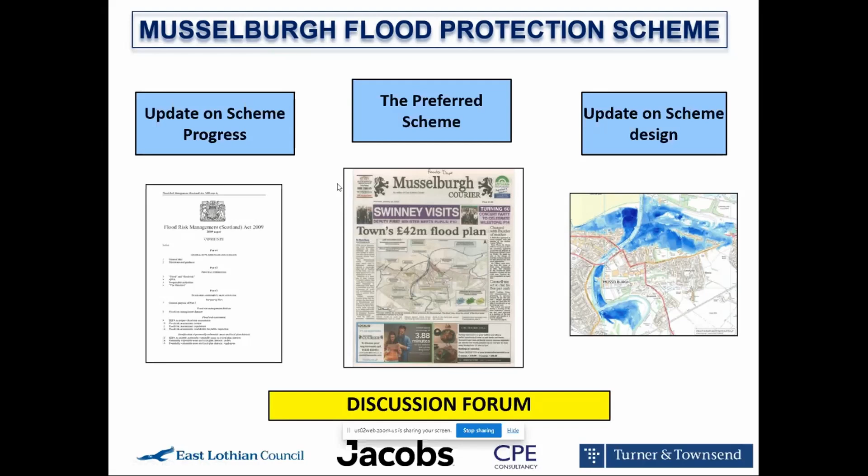So first of all, in relation to scheme progress, I wanted to begin the journey tonight by reflecting back to what I said to you in January 2019.

In relation to that evening, which you've already been reminded of, the presentation that night was broken into 2 parts. The first part was delivered by Gail Donald of SEPA, who turned up to provide you with an overview of flood risk management in Scotland and local flood risk management plans, flood mapping, and the Scottish Government's approach to taking forward flood protection schemes. Thereafter, I delivered the second part of that evening's event, providing you with an understanding of what a flood protection scheme is, how one was being set up for Musselburgh, and what the next steps would be in setting up such a flood protection scheme.

In relation to that event, I would just like to highlight that the slide deck from that event, as I recall, was made available to your organization back in 2019. If you don't have it, or if you have lost it, so to speak, we'd be delighted to provide it to you once more. And I would like to suggest that for all of you, it provides a very good snapshot into the early stages of a flood protection scheme.

Tonight, we're doing our best not to recover that ground, but back to back, they provide you with a really good journey on how we've traveled from the beginning through to today.

Just moving a little forward, I wanted to just again reflect back to that last event that we met. This is one of the slides from that presentation. Within it, towards the end of the presentation, I finished with what were the next steps.

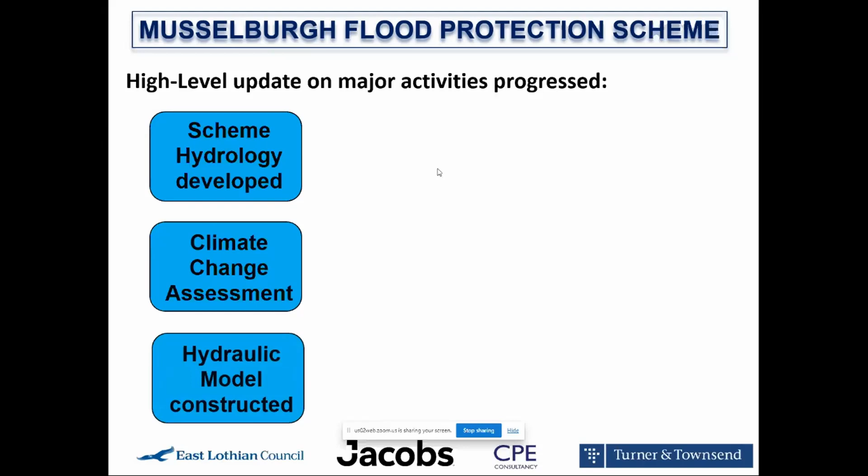The hydraulic model exists within our computer systems, and it is the tool through which we can map and model the flood water, and therefore produce flood maps of the extent of flooding within the town. The outputs from our early stage model were presented through the public exhibition to the town back in July of 2019.

We have been undertaking many surveys. I referenced quite a few of them earlier, and many of you should have seen the survey work undertaken across the town last year. In particular, you should have been aware of the ground investigation, the borehole rigs which were extracting ground samples from across the town.

We've been undertaking a significant piece of environmental work, and apologies for the acronyms. EIA stands for our Environmental Impact Assessment, and that has now formally commenced. Leading up to its formal commencement, we required to undertake a vast range of ecological surveys to capture baseline ecology data across the town.

We undertook a PEA, which stands for Preliminary Environmental Assessment, and we then undertook a formal environmental screening and environmental scoping exercise, the outcome of which is the structure through which we develop our environmental impact assessment to determine any potential environmental impact from our scheme, and then, if appropriate, to undertake appropriate measures to mitigate.

We set up and commenced our stakeholder working groups. These are with key stakeholders, statutory stakeholders, those with responsibilities under regulatory and legislative frameworks who work on your behalf as arms of the state.

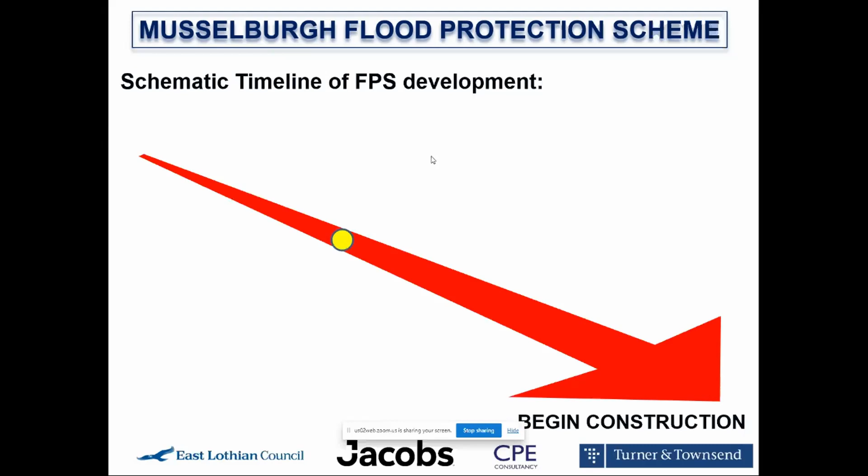Changing approach slightly for a minute, I wanted to walk you through the sort of pathway through the progression of a flood protection scheme as key points. Some of you will have seen this before, and indeed the only thing that has substantially changed on this timeline is where we are on it, so we have moved substantially down the timeline.

But to begin with, we need to define the problem. We need to gather huge amounts of information, work out all of the options, then determine the best approach, which is our option appraisal process, consult with many parties to determine what they think of our thoughts and approach to mitigating the risk, bring all of this together to determine the preferred scheme, which has concluded, and thereafter we need to undertake an outline design of that preferred scheme to confirm it's viable and technically feasible, and to allow it to evolve, because evolve it will through that design process.

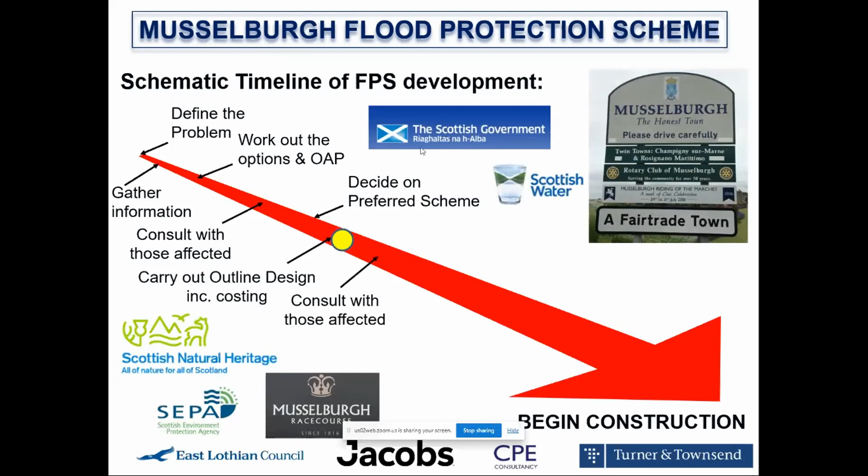And then at an appropriate point in time through the evolution of that outline design, we need to re-engage with all of our key stakeholders and the people of the town before once again making an engineering judgment to bring it together so that we can deem the best approach to flood protection for the town, which we then take forward to formal approval to get the scheme approved. And only once the scheme is approved do we cascade into the detailed design, preparing construction drawings, developing a tender, such that we can take forward the project to work and therefore begin construction.

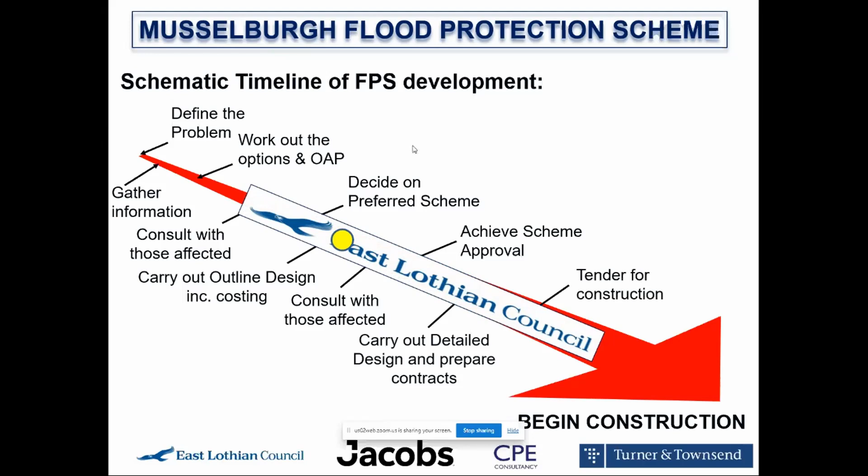So it's a long journey. There's a lot of steps on it. There's no point pretending it's easy nor quick, but at the same point, we're making continual systematic progress through that pathway and will continue so doing.

Which leads me on to the preferred scheme. So the preferred scheme is a key stage on our journey as we move forward. It's not the final product, it's simply a step on that journey. But it allows us at a moment in time to crystallize our thinking pertaining to where we're at, to put it down in words and form, and to take that forward for formal approval.

Now that formal approval was achieved through an East Lothian Council Cabinet meeting on the 21st of January 2020. And Cabinet approved the preferred scheme at that point in time. And within that report, we made key recommendations as to what they were approving and to clearly define what it was that we would then do to move this forward.

I think it's worth just highlighting a point that has been raised to me on a number of occasions by the town's councillors, and that is a feeling of disappointment by some within the town that that report was taken to Cabinet and not to Council, because not all councillors are in the Cabinet, and most of the town's councillors did not get an opportunity to participate in that decision making. The town's councillors were part of the public exhibition and the engagement, but it is clear that they were not part of that Cabinet meeting if they were not on the Cabinet.

So within that report, we changed the journey process, and we now have clear instruction that the next time that we need to get approval from within the council, we will be going to council itself and no longer to Cabinet. But for that meeting, I was bound by a previous requirement or obligation to go back to Cabinet, and I couldn't jump across parallel pathways to Council. It's slightly complex, but just to highlight that we have corrected that historic error, and that will not be happening again, further to clear request from the town's councillors.

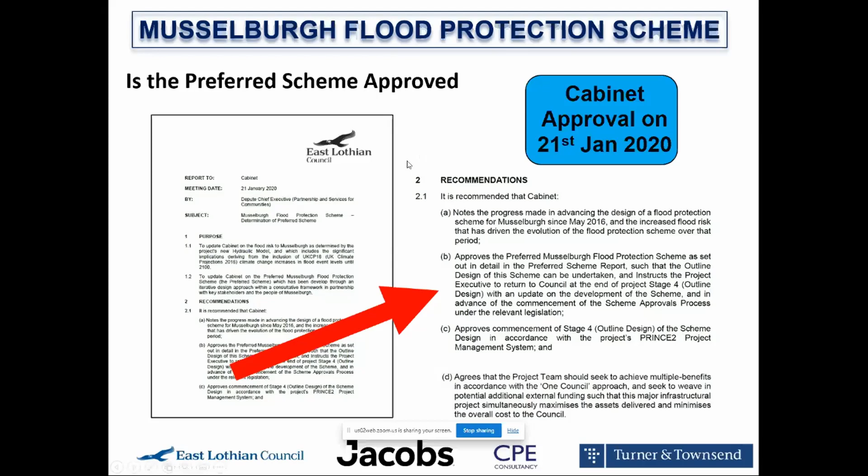So just moving forward, a couple of bullet points on the scheme, but just to clearly highlight to you that the point of the scheme is to reduce flood risk. And we set out with an aspiration to reduce flood risk against the 0.5% AEP flood event, which is also known as the 1 in 200 year event, and to include with this an allowance for future climate change, which we now understand to be a risk that is coming towards us as the years pass.

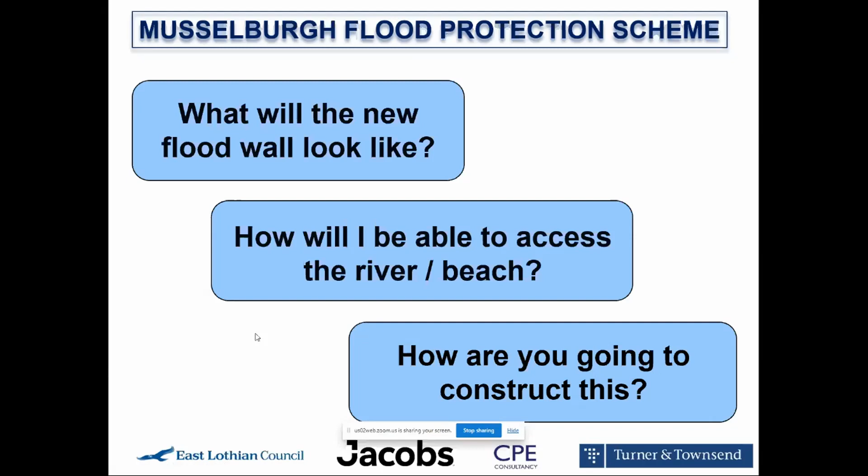I put this slide up previously, including a year ago at the Community Council meeting, but I think it's essential to put it back up. The question that always comes to me is: that's wonderful, you've given us loads of detail, but it doesn't tell me what it will look like, how I'll access the outside from the inside, the beach, the river, and how we're going to construct it. The reason we haven't told you is because we don't know. The reason we don't know is because the outline design isn't done. The outline design will be done in consultation with the people of the town, and only then will we know the answers to these questions.

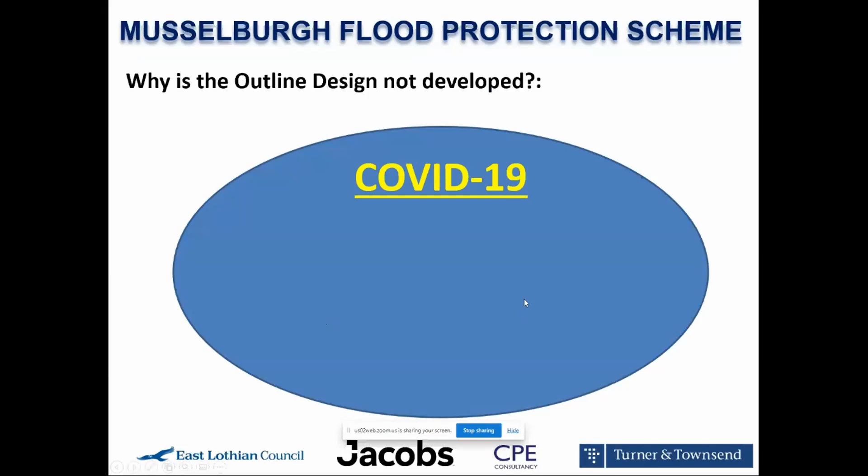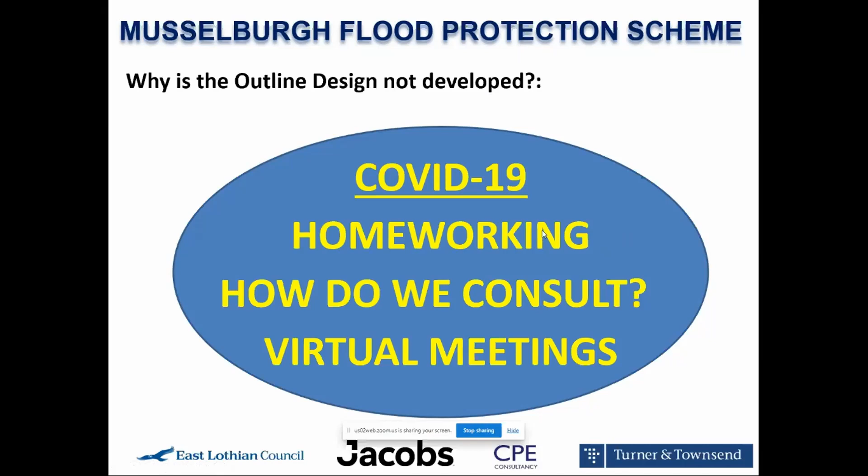So why is the outline design not developed? We intended to develop it from March of last year. In March of last year, something else happened which has dominated all of our lives since: COVID-19 came and scuppered our plans. It reduced us to home working, to virtual meetings, to pondering how we continue to consult with the town to deliver our scheme, and left us in a very difficult situation. We have been constantly trying to evolve and deal with that situation in a working environment, just as we have in a personal sense, just as all of you have as well. But it has substantially challenged us over the period.

I'd like to turn my attention now to discussion of consultation and how we develop the bespoke flood protection scheme we have promised for the town, given these challenges. I want to reiterate that the project team, and thereby the council, has committed to developing a flood protection scheme through a consultative process with key stakeholders and the people of Musselburgh. COVID-19 removed our ability to do so last March.

Therefore, the project team moved to rearrange the project's programme. We stopped delivery of the outline design last March, April, and instead restructured our programme to undertake substantial amounts of survey work and other technical details in the background which were necessary for the development of the project, but which did not link to the actual evolution of the outline design, which we wanted to do in consultation with stakeholders and the public.

We proceeded to undertake that survey work at risk. We didn't know if we would be able to deliver within the town through the summer, depending on how COVID played out. I'm delighted to tell you that the survey programme last summer was 100% successful, and we achieved everything we hoped we would achieve, and we did so safely without impact to our workforce deriving from COVID.

But by the autumn, it became increasingly clear to us that COVID wasn't going away, and that there would not be an immediate return to normal, or potentially no return to normal. So under the management of the Scottish Government and our project board, we moved to put in place a new strategic communications plan and to develop a suite of new communication tools through which we could manage consultation moving forward.

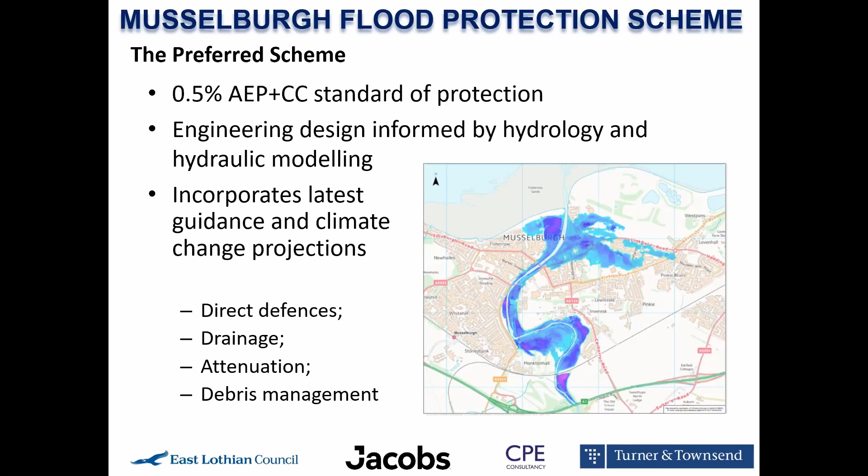So in terms of the key locations within the town, the direct stretch of direct defences we're looking at - if we start at the upstream end, which is the south end of the town, you can see there at the Esk Mills Weir and at the Mill Lade, essentially we're starting at the field, locally known as the Giant Hogweed Field, crossing across there, tying into high ground, but then following down the right-hand bank of the Esk around Station Road towards Olive Bank Bridge.

Downstream of Olive Bank Bridge, we then require defences on both sides of the river. They would tie into high ground on Esk Side West and at the car park at Mall Avenue. We then have defences down both sides of the river, tying into each of the bridges - around the sides of the Roman Bridge, then the Rennie Bridge, the Shorthope Street footbridge, the Electric Bridge, the Goose Green Bridge, which I haven't managed to put a label for there, and all the way down to the mouth of the Esk.

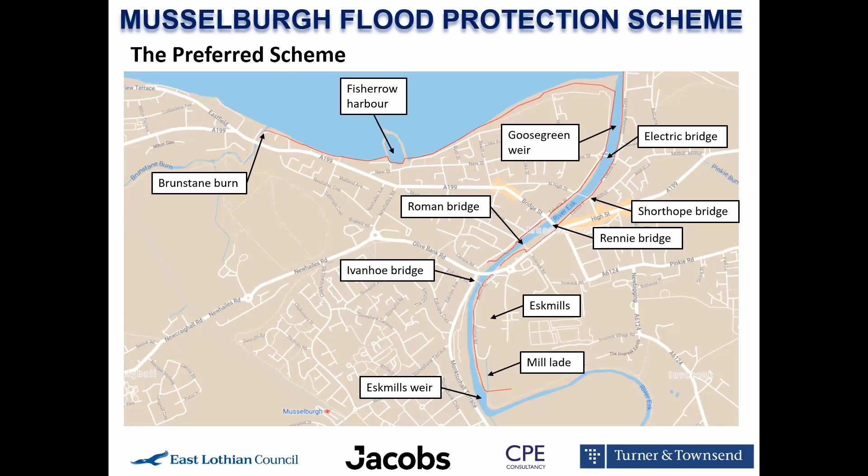On the right bank, the defences would then tie into the existing sea wall that goes round about the lagoons, and on the left bank we would wrap around the coast towards the west, around Fisherrow Links and the promenade, around the back of Fisherrow Harbour and along the back sands and beach, tying into high ground at Brunstane Burn, which is the boundary with City of Edinburgh Council.

So just to give you an understanding of direct defences, and I mentioned that those are either flood walls or flood embankments, we're looking at 5.5 kilometres worth of these direct defences in Musselburgh. Now, as Conor mentioned earlier, we don't know what those are going to look like yet, or the nature of those. What we have started to define is the position of those flood defences and how high they would have to be to contain the flood water.

I'm just giving you an example here of different types of flood walls, and these are projects that I've worked on. On the left-hand side is the White Cart Water Flood Prevention Scheme on the south side of Glasgow, just round the corner from Hampden Football Park. On the right-hand side, we've got Hawick Flood Protection Scheme that Conor and I also worked on, currently under construction in the Scottish borders.

You can see that there are very different kinds of treatments depending on the location. We have a formed concrete finish on the left-hand side, and in more sensitive areas on the right-hand side, you can see stone cladding. It's still a concrete core to that wall, but it's also clad in stone to tie in and blend in with the surrounding environment. So you might expect Musselburgh, within the conservation area, to require a higher finish than you might see along the coastal stretch or around the Esk industrial area. We'd expect, once we've consulted with all the relevant people, to see different types of finishes in different areas.

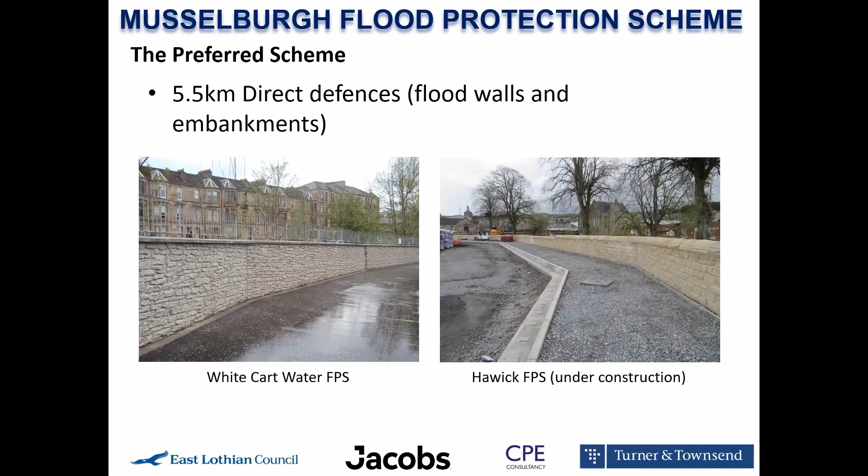Moving on from the direct defences, a key part of this is utilising two existing reservoirs in the catchment to the south of the town - I mentioned those at Rosebery and Edgelaw. These reservoirs are a classic example of Victorian architecture and engineering, used to supplement the flow of water into the river during the Industrial Revolution when the mills needed the river topped up to a higher level to operate and power the mills. Nowadays those reservoirs sit full of water but aren't used for anything - they don't provide a water supply to the town, they're not drinking water, just essentially a legacy of the industrial age gone past.

What we're looking at here is to modify those existing reservoirs to create a storage potential. If we were to reduce the normal water level - you can see the reservoir is full in the photograph - that creates a storage volume between there and the top of the dam, such that when a storm occurs, the water is stored and we can release it in a controlled manner, so the maximum flow in the river passing through the town is less than if the reservoirs were full at the start of the storm.

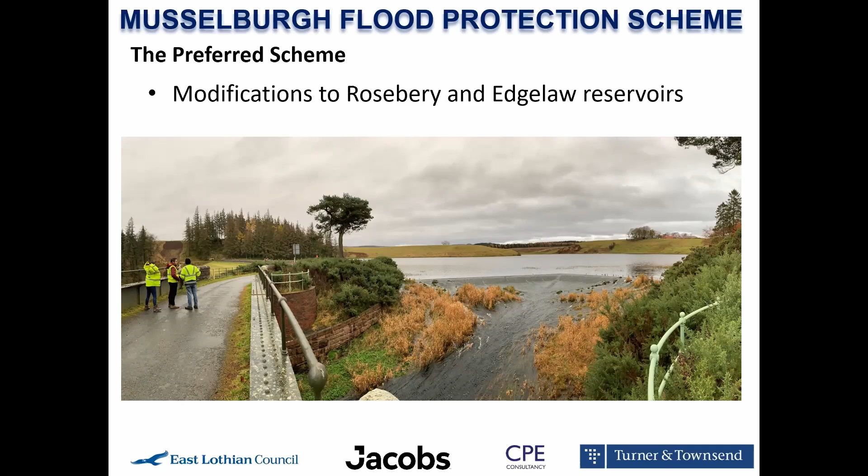This picture shows the spillway and the overflow weir next to the crest of the dam, and this photograph is the step spillway downstream of the previous one. The water spills over the weir and then discharges downstream, eventually leading into the Esk.

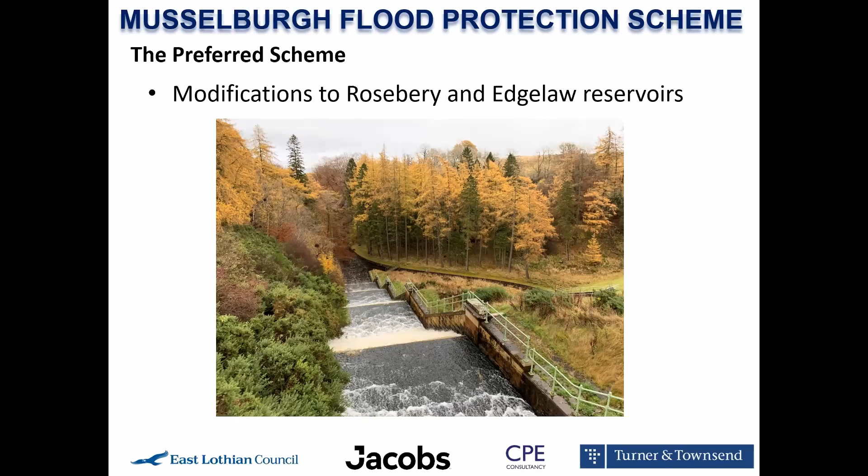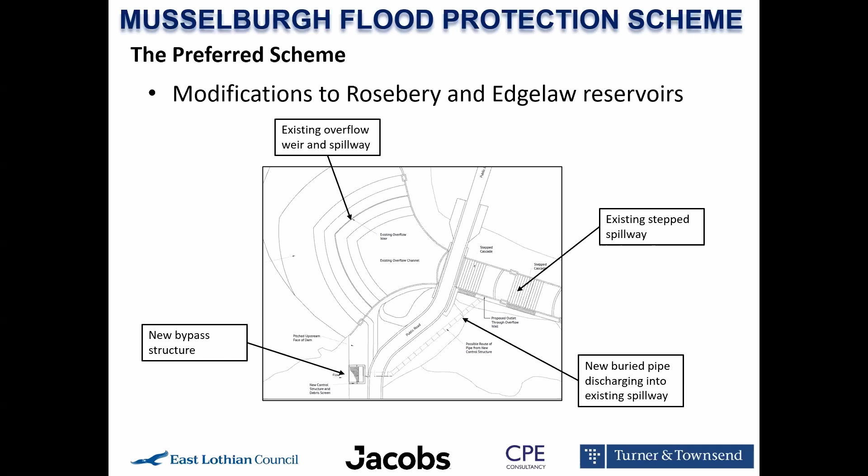So that's a key aspect to the holistic design of the scheme, that we're not just relying on flood walls and embankments in town. We're looking at a three-pronged approach: defences in town, but by incorporating debris management and reservoir attenuation, we can reduce the peak of the storm and therefore reduce the flow into town, and reduce the likelihood of blockage underneath the bridges. The big benefit is that the defences otherwise would have to be higher in town, but by incorporating these other aspects to the design, we can reduce the height of the defences that would be in town.

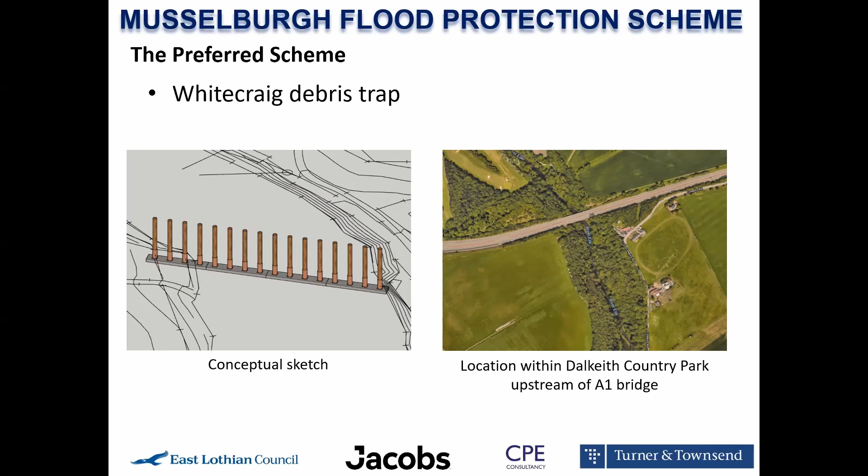If I move on to the next slide. Active travel is looking at different modes of transport in the town, and given that we're going to be working along the river and the coast, digging up the ground to put in the foundations of the flood walls, it makes sense to consider: when we reinstate the river banks, paths and roads, can we put something back which is more than what was there before, rather than just replacing tarmac for tarmac's sake? Can we do something smarter and more usable for the town, and add value while we're putting in the flood defences?

So potentially we could be looking at a coastal promenade parallel to the coastal defences, which would be an amenity asset to the town - people taking family out, going for a leisurely cycle, walking the dog, pushing the buggy - that we could incorporate along the coast.

Equally along the riverside, we could be looking at people going from their home in one part of town to their work in the high street, or travelling to the train station, either commuting into Edinburgh, or students coming from the university down into town. So there are different types of journeys and different locations that people want to get to.

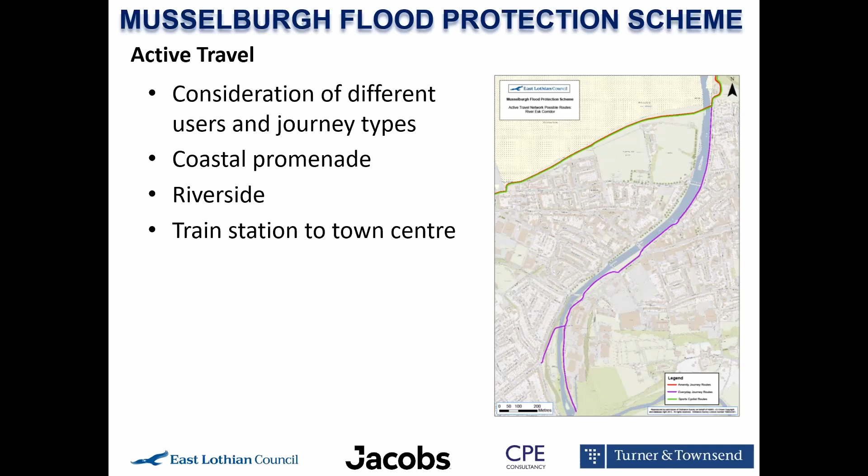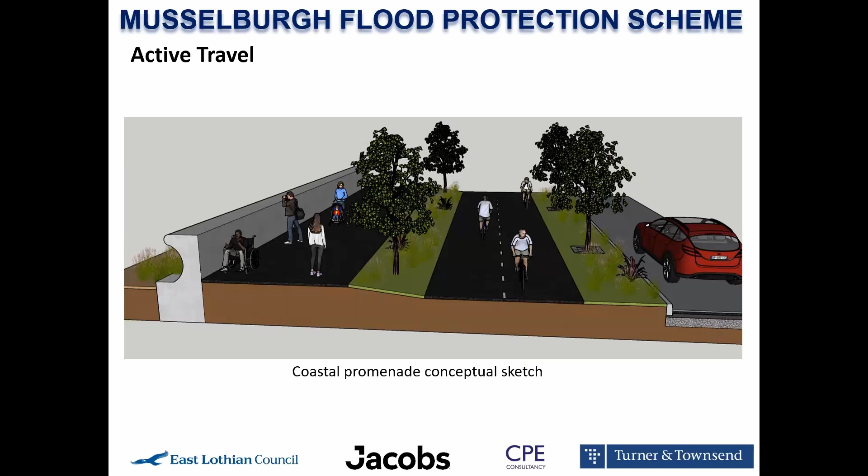So Conor mentioned that COVID-19 changed everything for us, and we had been planning to do a lot of that engagement with the public, people like yourselves, last year, to have developed more definite solutions for exactly what the defences and other aspects of the project were going to look like. So what we've tried to do instead is work with the restrictions in place, and we've redesigned our programme to focus last year more on data collection to inform the engineering design, so that we can then focus this year on public and stakeholder engagement, to put the meat on the bones, so to speak.

So last year we carried out fairly significant ground investigation contracts. There were something in the region of 40 boreholes sunk around the town to give us a detailed understanding of the ground conditions as they change around the town, which are key to understanding buried extents of the structures that would be required.

So if you think about flood defences, something akin to an iceberg - for everything you see above the ground, there is a much more significant foundation below the ground that you can't see, and that's highly dependent on the types of soils we have underneath the ground. So we've gathered all of that information that we now need.

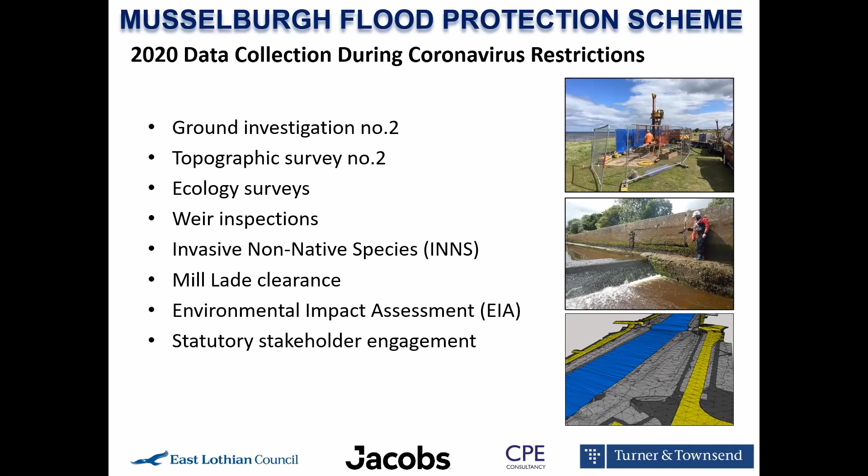We've tried our best under fairly difficult circumstances last year to engage with statutory stakeholders. While it might have been challenging to engage with individual members of the public, those working in organisations like SEPA, NatureScot or Historic Environment Scotland—we've still been able to engage with them in a virtual environment like this evening, so we've still been working with them.

So that's where we've got to so far. In terms of next steps looking into 2021 and beyond, we obviously need to progress the detail in the outline design and understand what that's going to look like, and whether people are agreeable to what we're proposing. We're going to continue engaging with those statutory consultees through working groups, whether virtual or in person.

These working groups will be based on different themes. There'll be one focusing on roads and structures, another focusing on coastal and watercourse impact, and others focusing on public utilities, etc.

And a key aspect is the enhanced landscape design. We've talked about the opportunities that come with developing and constructing linear infrastructure, such as a flood scheme, and we understand there's potential to augment and put something back which is smarter, better, and more appropriate for the town. So we're looking at where we want to focus our landscape design efforts, either along the coast or along the river.

That'll form a main part of the outline design. The culmination of that will be to present the outline design to a public exhibition, giving the public an opportunity to feed back as to whether we're on the right track, or if there's anything we haven't considered or need to tweak or change. Once we gain that information, we can revise or make changes to the scheme, and at the conclusion we'd publish the scheme as part of the statutory process.

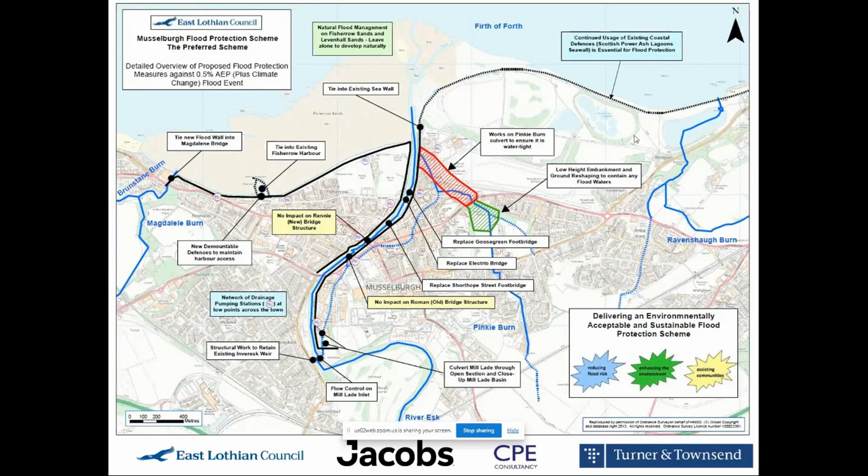What I would say is that I am very clear, and we as a scheme were very clear in January 2020 when we put that point into this slide, of the importance of that seawall. I would assume the future owner of that seawall has a responsibility to it, and therefore to the encasing of what was a waste deposit, the Ash Lagoons, and also to the town that sits behind it. Only time will tell how that plays out. So I'm going to leave it at that tonight. I hope that suffices. Thank you.

Thank you very much. Sorry, can somebody confirm that my slide has gone away again? Yes, it has. Yvonne, are you coming back again? Can I ask another question? Could I make a point, please? Yes, please. I've had my hand up four times.

I appreciate that you can't tell us what the Musselburgh scheme is going to look like, but can you give us some idea as to what provision is made for actual wildlife? Because at the moment, the ducks and the swans and the geese all come onto the embankment with the young ones, and I just wondered from other schemes what provision is made for the wildlife.